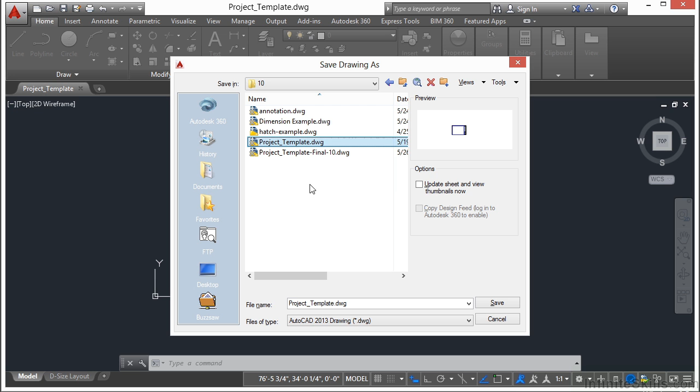We're going to start by opening up the project template file that we created for the layering chapter. We've already created some of these layers, so we're going to add to that main file. Go to Open Files, browse to that folder, look for the project template file. Open it up. Now I'm going to do a Save As because I don't want to override that file, and I'm going to override this file that I had started just to make sure I had everything going correctly. This will give you a fresh start, or the same start that I have when we start our drawing.

If you open up the Layer Manager, you'll see that we have a bunch of layers in here, many of them which we had created ourselves or changed.

Now what we need to do is to make 3 text styles. Type in the word style. We're going to make 3 of them: a notes, a header, and a title. Click on the New button, name this one Notes, click OK. Now let's just go ahead and use the Arial font, regular, and we're going to set the text height of 1/8 of an inch. Let's leave everything else the same.

Click Apply. Now let's make another new one. Call this one Header, H-E-A-D-E-R. Again, we'll use the Arial font. I often use the Arial font in AutoCAD because it's very thick, it's blocky, makes it easy to read, and being able to read easily your drawings is a must.

A lot of times these drawings are in a machine shop or they're out in the field on a construction site. They get dirty, they get folded, they get ripped, and the easier the text is to read, the better. We're not looking to make beautiful works of art here. We're looking to make a tool, a guide to create something. And so a lot of times the creation process gets dirty and messy, and so will your drawings. So I like the Arial font because of its simplicity and its blockiness to it. It makes it easy to see.

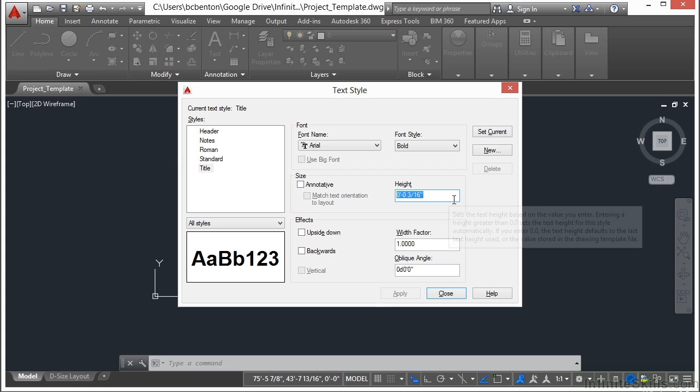Okay, so for this header, we're going to make it a little bit bigger in size. We're going to go 3/16, and I want it to be bold, title-like headline for some of our notes. Click Apply, and we're going to make one more. Click on the New button, and let's call this one Title. Again, Arial and bold, and yet bigger still in size, a full 1/4 inch. Click Apply, and then click Close. So text styles are very easy to make.

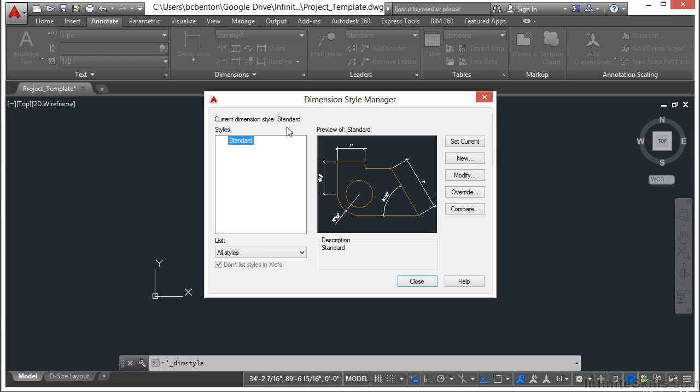Now let's make a dimension style suitable for an architectural drawing. Let's go to the Annotate tab, go to our dimensions, click on the little flyout button here to get to our styles. Now there's only one in here, we're going to make a new one. It's a copy of the standard, but we're going to call it Arch Project. Click Continue.

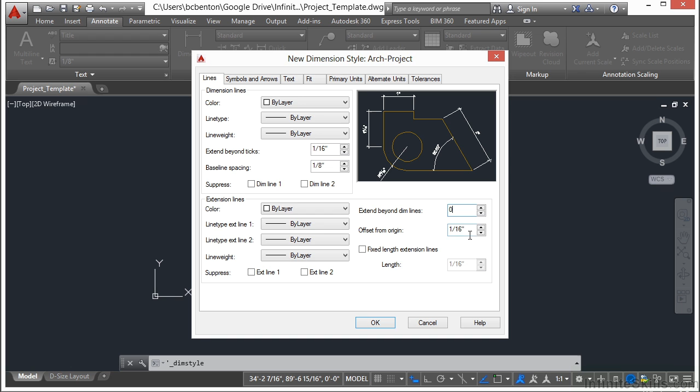Okay, we're going to do just a few things here. We're going to go to the Lines tab. We're going to make everything by layer, same way with the colors of everything else down here, and the line type extensions, and the thickness. Now we're going to change this Extend Beyond Dimension Lines to 0. And that's all we're going to do in this tab.

If we go to the Symbols and Arrows tab, make sure these are set to Architectural Tick. That's what I want to use. Everything else on their standard should be fine. Now go to Text. On the text style, we're going to pick one of the new text styles that we created called Notes. That way it'll match our font and our height the way we want. And I'm going to make the text color by layer. That's it. Click OK.

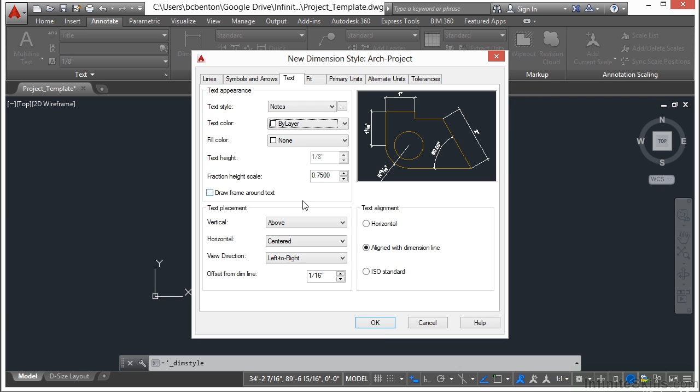Click Close, and then make sure you save your drawing. That's it. Just a few tweaks to that dimension style, nothing crazy, and just a few text styles that we set up. Let's make sure that this Arch project is our current dimension style, and let's make sure our notes are the current text style. Okay, now save your file. Every time you go to start a drawing, you'll have dimension styles, text styles, and layers already set up to make a good looking architectural drawing.